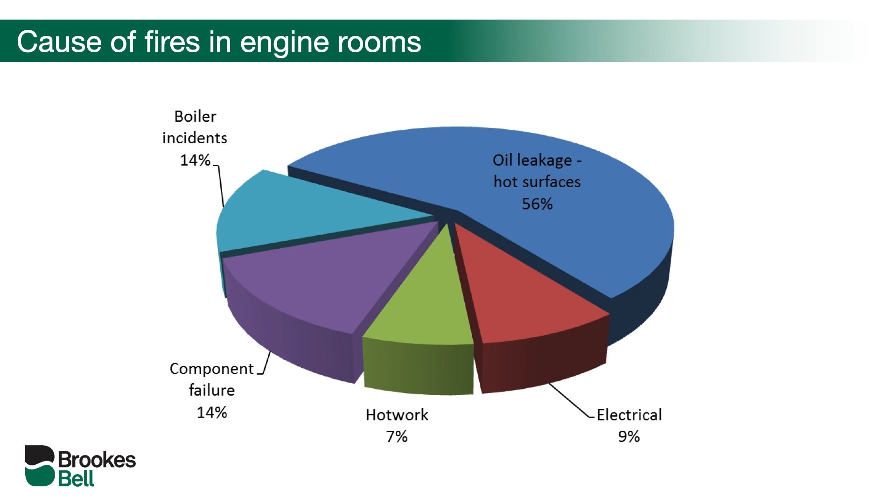Then we will narrow down even further to highlight a propensity of fires caused by failures within the low pressure fuel oil supply and return system, sometimes called spills, compared with the high pressure fuel injection systems. Now this is not all new news, and such fires reoccur despite SOLAS and other guidelines issued many years ago, a summary of which now follows.

New design rules were introduced in the SOLAS amendments of 2000 and implemented by 2003, as exemplified by this MAN B&W service letter to ship owners and operators dated January 2003, recommending the installation of jacketed double skin fuel pipes for high pressure fuel injection systems at the first opportunity.

In 2009, guidelines for fire prevention in engine rooms and cargo pump rooms were issued by the IMO Maritime Safety Committee in Circular 1321. Some of these guidelines are summarised in this slide, and I will be discussing more of them in detail later.

As regards the last item for hot surfaces, some may ask why the criteria is set above 220 degrees. Well, this is based upon the auto ignition temperature of the lighter fuels, such as MDO and MGO, which have a minimum auto ignition temperature of 250 degrees. So there's a margin of safety in keeping any hot surfaces, such as exhaust systems, below 220.

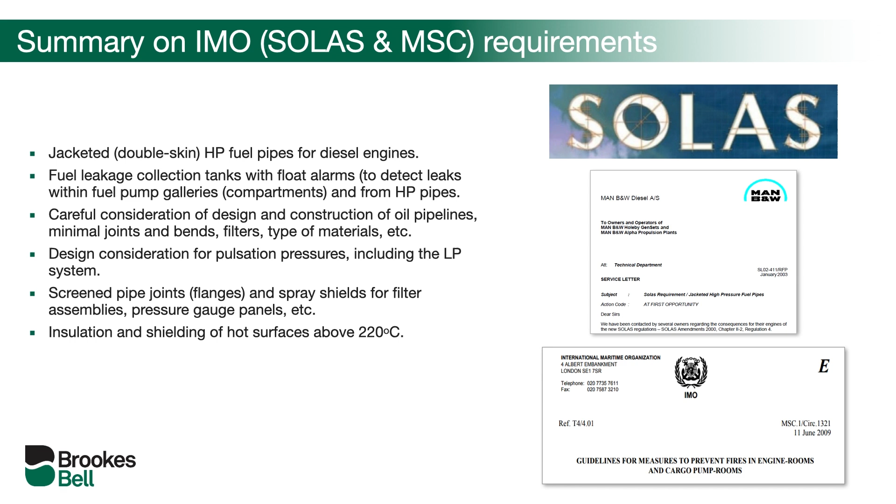Heavy fuel oils have an auto ignition temperature of about 400 degrees C, and lube oils are about 320 degrees C. Remember that auto ignition temperature is the temperature at which a substance will spontaneously combine with oxygen and burn without the need for an external ignition source. It is the vapour that ignites, not the liquid itself.

Here we see a diesel engine fuel system which incorporates some of the SOLAS requirements: a double-skinned high-pressure fuel injection steel pipe with minimum joints and bends, by having the pipe pass directly through the cylinder head to the fuel injector.

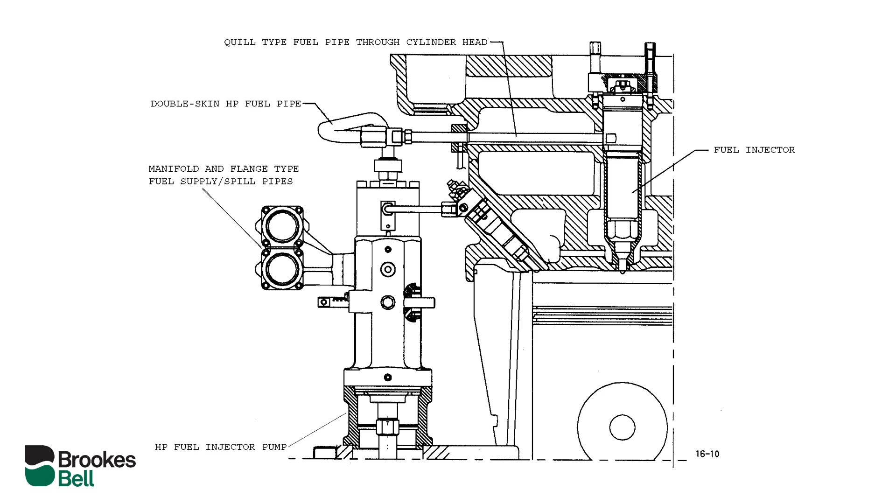These requirements have reduced the risk of high-pressure fuel system failures, but failures to the low-pressure system - that is, the fuel supply and spill systems - have persisted, as we will see later.

Here we see a double-skin fuel pipe, which also allows for the failure of the internal pipe to be detected by routing the annular space to a leakage tank with a float-type alarm. We will see later how other potential leakage points could be piped to such an alarm tank, for example, fuel oil filter containment enclosures.

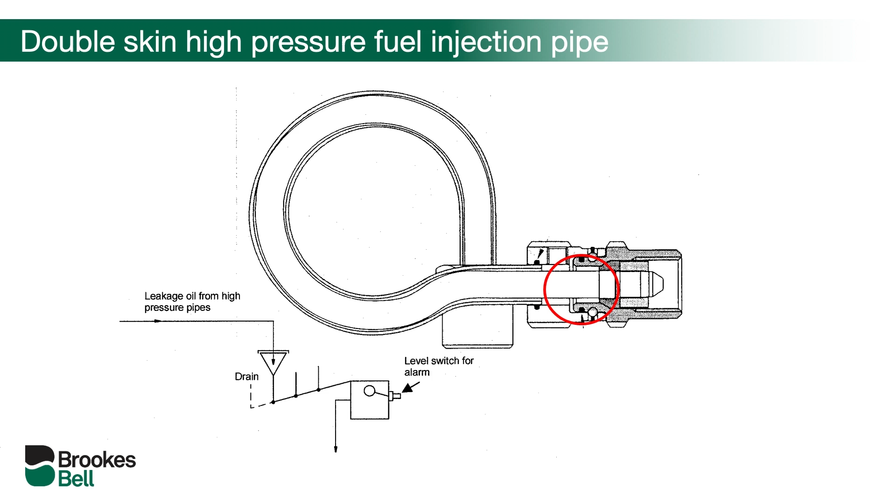Now, over the years, I've seen more fires involving 4-stroke medium-speed engines and auxiliary diesel engines, including those on container ships, which tend to have 4 generators compared to, say, a bulk carrier with 3.

For a large, slow-speed 2-stroke engine in the left-hand image, we see the fuel injection pumps, circled, are distant from the exhaust system and turbocharger. Only the high-pressure fuel injection pipe is nearby the exhaust system, but that pipe is double-skinned.

For the generator engine in the right-hand image, note that the filters, again circled, are in fairly close proximity to the turbocharger. Indeed, MSC 1321 recommends as much distance as practicable between fuel filters and hot surfaces or other sources of ignition, but we are still not seeing that implemented in all engine designs.

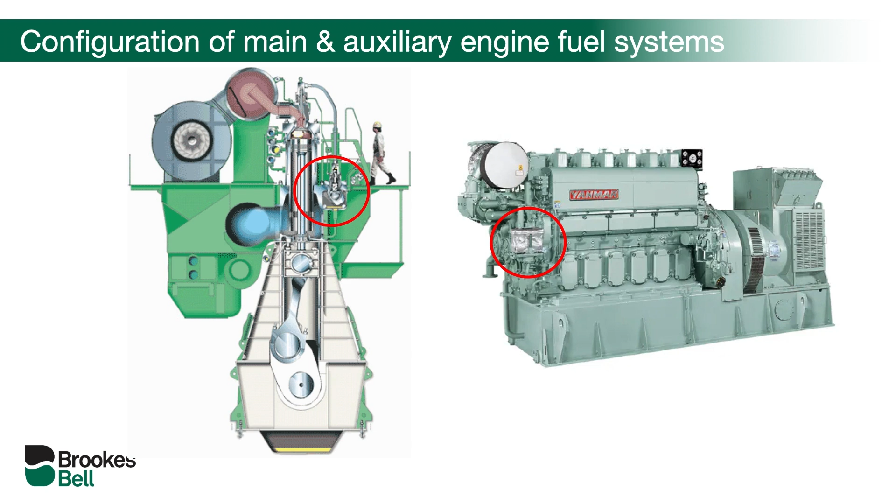Another factor is if the generator engine is using marine diesel fuel oil, which has a lower auto ignition temperature than the heavy fuel oil burned by the 2-stroke engines.

Here's a closer look at the filters on the Yanmar engine we looked at in the previous slide. Again, note the proximity of the filter to the turbocharger. Compare that with the filter unit on the Cummins engine, with the filters coloured in red, well away from the turbocharger.

It can be seen that the filters for the Yanmar engine have silver-coloured heat insulation covers, which may also offer some anti-splash containment, so long as the covers are always in place after cleaning the filters. We will see later that a better arrangement would be to have the filters still insulated, but also fully enclosed in a sheet metal box.

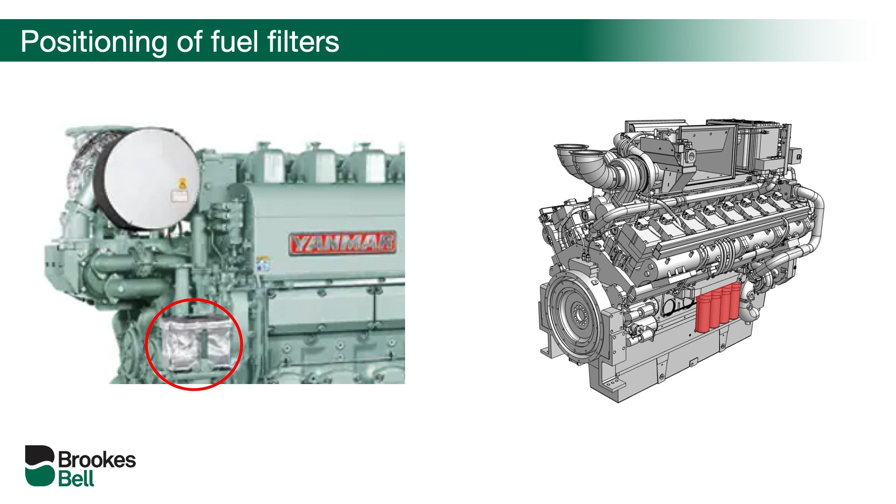Returning to the difference between fires caused by high-pressure systems with double-skin pipes and the low-pressure fuel supply and spill returns, we see the problem in these numbers: 50% of failures occur in the low-pressure system compared to the high-pressure system. This is important because intuitively an engineer may consider the high-pressure fuel system to be the greater risk, but awareness should always be directed towards the low-pressure fuel system as well, which appears to pose a significant, if not greater, risk of fuel escape and fire.

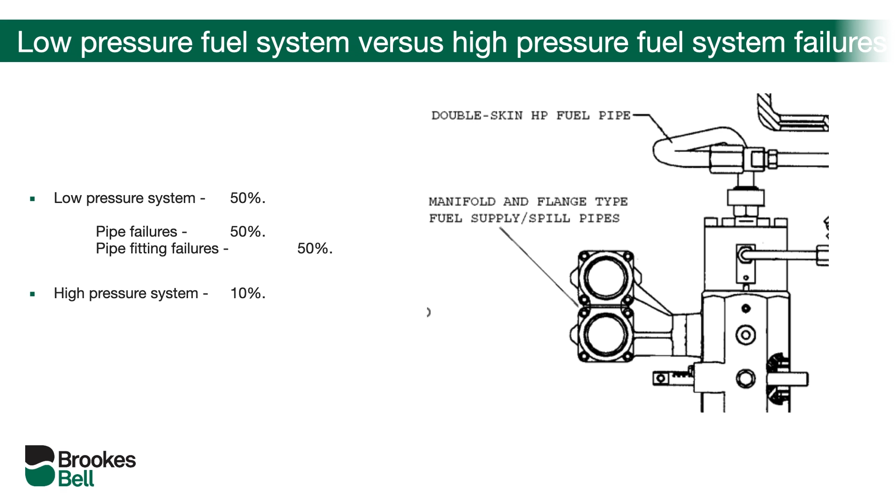Now let's look at some of the reasons why. So we have fatigue, vibration, pulsations, chafing - that's rubbing of pipes against each other or structures - lack of brackets for security, and so forth. Now, fatigue does not mean that the pipe or equipment is tired. Rather, in material science, fatigue is the initiation and propagation of cracks in a material due to cyclic loading.

The pressure during such pulsations can be several times more than the nominal pressure of the low-pressure system. The cyclic nature of these fuel pulsations, low supply pressure then high peaks, favours fatigue and the initiation of fractures due to tensile stress and failure, unless the pipes and fittings are properly secured. This applies to the holding down bolts for fuel injection pumps and bolts for fuel pipe flanges.

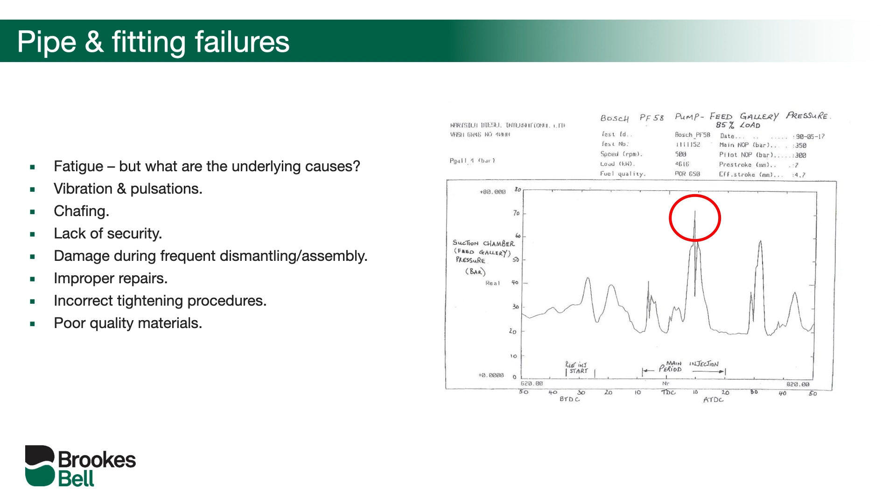We'll now see some examples from cases investigated by Brookes Bell.

This was a failure of a small bore fuel oil spill pipe on a diesel generator, which allowed an escape of fuel onto the turbocharger and a major engine fire. Metallurgical examination confirmed fatigue failure of the pipe, and the root cause was vibration due to missing brackets.

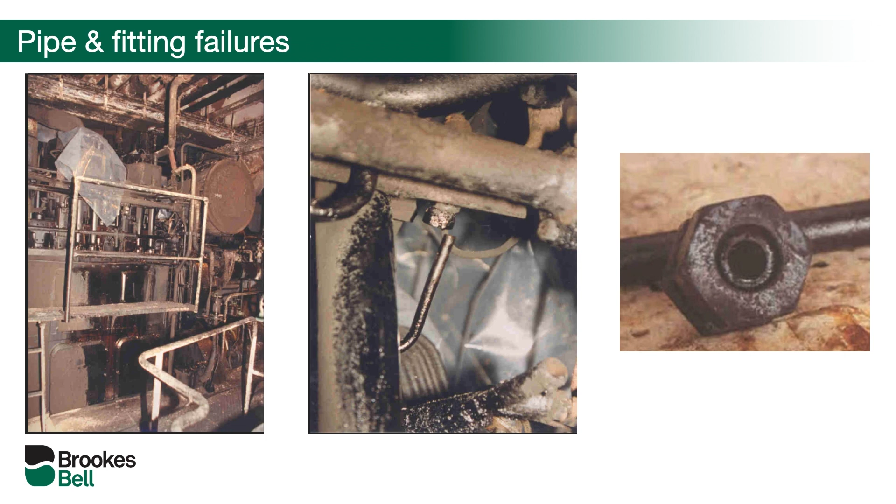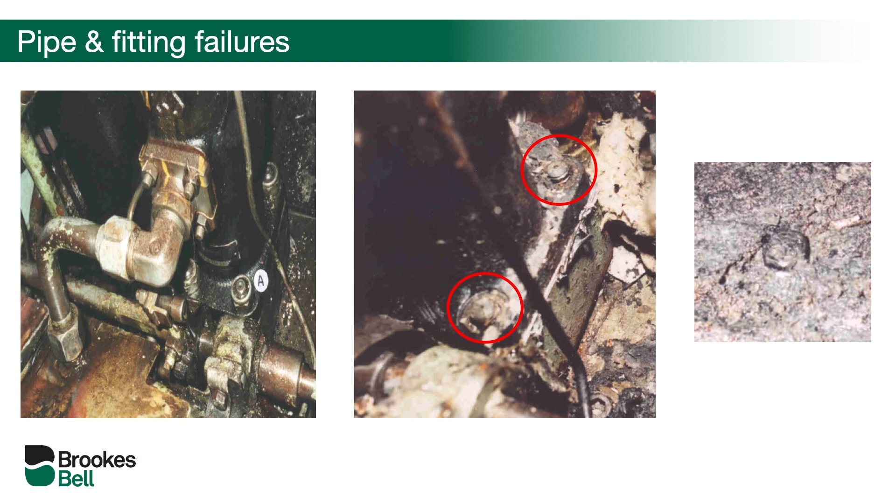This pump was then repeatedly lifting off the camshaft, resulting in an escape of fuel from the low-pressure fuel supply pipe, which impinged on exposed hotspots at the turbocharger. And this was the result of the fuel escape - a major fire.

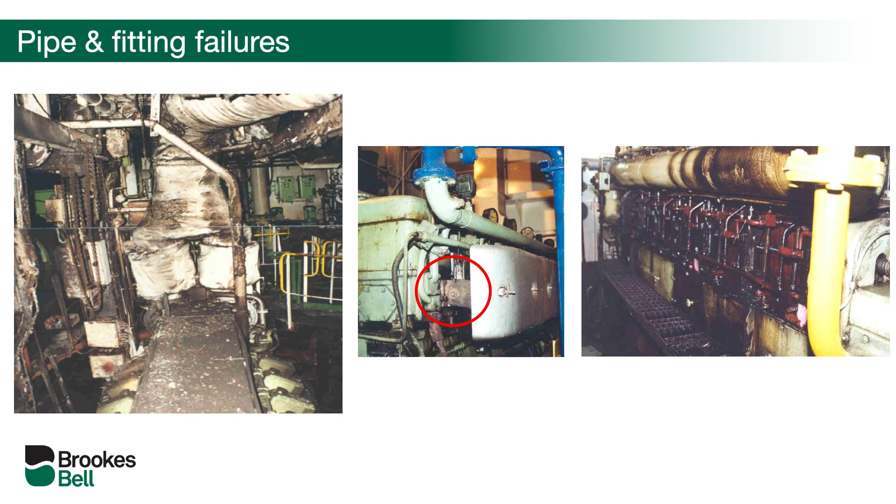The other generators were inspected, and you can see exposed exhaust piping in the centre image, and fuel leakages and a lack of covers at the fuel pump gallery on the other side of the engine, a result of poor maintenance.

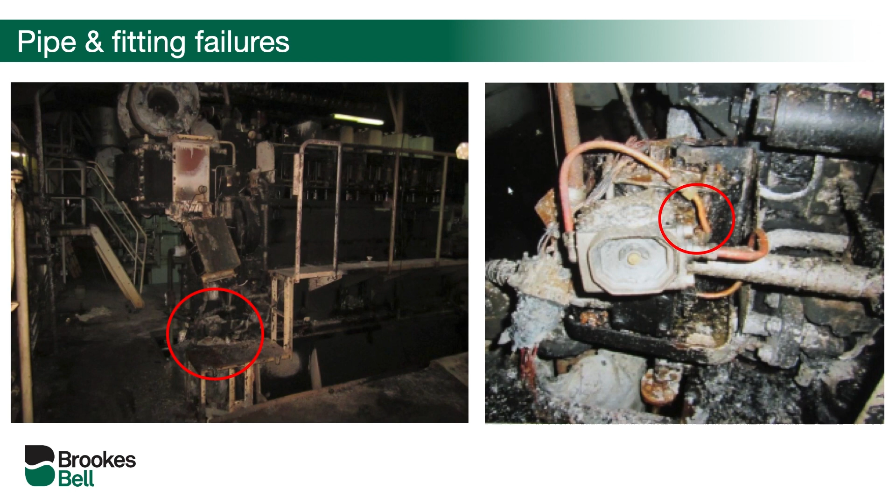So a number of things wrong here. The pipe should be steel, as provided by the original equipment maker, and not copper, because copper work hardens and becomes brittle and prone to fracture. Then note the poor installation involving a large loop and lack of brackets. There was also missing shielding from around the filters to prevent spraying of the leaked fuel oil.

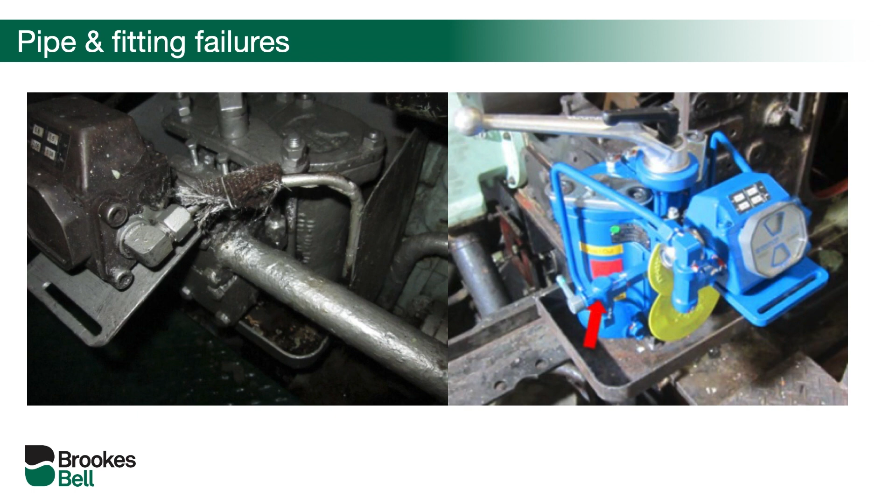Unfortunately, I found the IMO Circular 1321 and class rules somewhat ambiguous on the use of copper in fuel systems. If you word search copper in MSC 1321, you will see it appears four times. Section 6 refers to pressure and temperature gauges, and at 6.1, headed design, it states that copper pipes, where permitted, may be joined by brazing, but solder connections should not be used. At 6.3, under inspection and maintenance, it says copper gauge piping is particularly sensitive to work hardening, and all gauge pipes and fittings should be regularly inspected and maintained in good working order.

Then in section 7, under pipe fittings, it states at 7.14, dealing with design, all copper and aluminium brass pipes should be heat treated, annealed - that means softened after work hardening during installation - and fitted with sufficient supports to prevent damage from vibration. So far it seems copper pipes are permitted, but then it says replacement with steel piping should be considered.

Finally, much later at pages 14 and 15, which refers to the high-pressure pulsations in the low-pressure fuel supply systems which I addressed earlier, under section 1.3, design considerations, and 1.3.5, it says fuel pipes should be of steel, and support should be adequate to prevent fatigue due to vibration, and the support arrangement should also protect the system caused by high-pressure pulsations. Then it states copper and aluminium brass should not be used, as their inherent work hardening characteristics make them prone to failure when subjected to vibration.

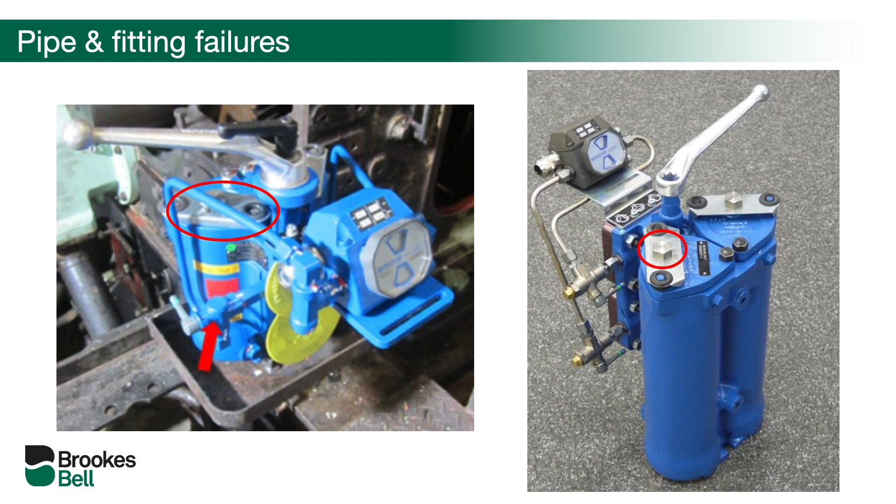At the exhaust system, on the left-hand side, there are potential ignition sources: the exhaust system, as I mentioned, and electrical devices. In container ships, there may be a similar arrangement, but with 2 generators in pairs, port and starboard of the engine room.

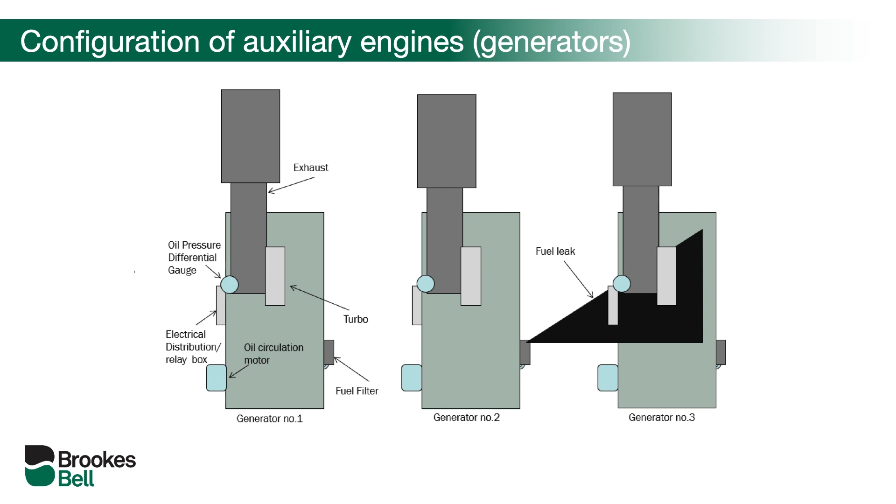These are the images of generator number 3, which caught fire, which then spread back to number 2 generator. We can see the oil circulation motor at the bottom left and the exhaust turbocharger assembly. There's also some electrical distribution relay boxes and pressure switches. So some potential electrical ignition sources, but the actual ignition point was the exhaust system in way of the turbocharger.

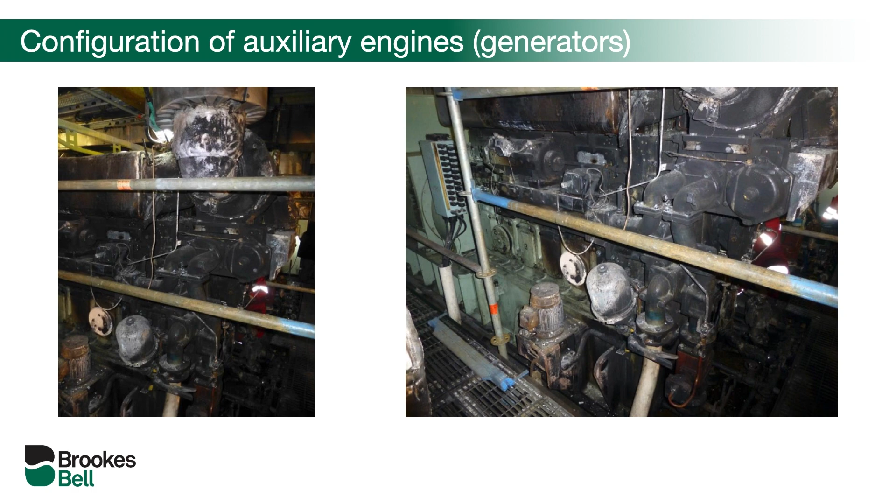Here we can see the insulation on the exhaust on the left-hand image, where it comes from the manifold before it enters the turbocharger assembly. There is a gap in the insulation, exposing bare metal of the exhaust pipe underneath.

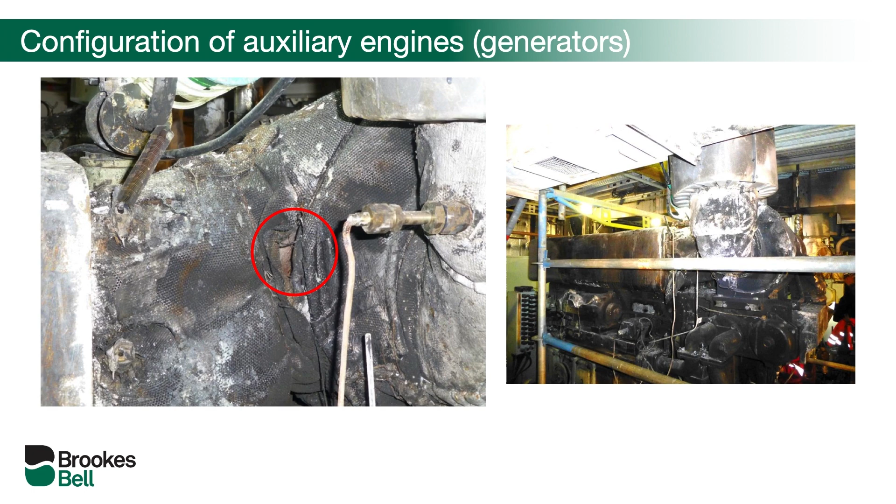This was a similar incident when an escape of fuel from number 2 generator filter assembly impinged on the exhaust system of the adjacent number 3 generator, the fire then flashing back towards the fuel source, creating another fire at number 2 generator. Note that the duplex filter unit is partially enclosed in a sheet metal box to prevent the spray of fuel onto its own exhaust system behind the box.

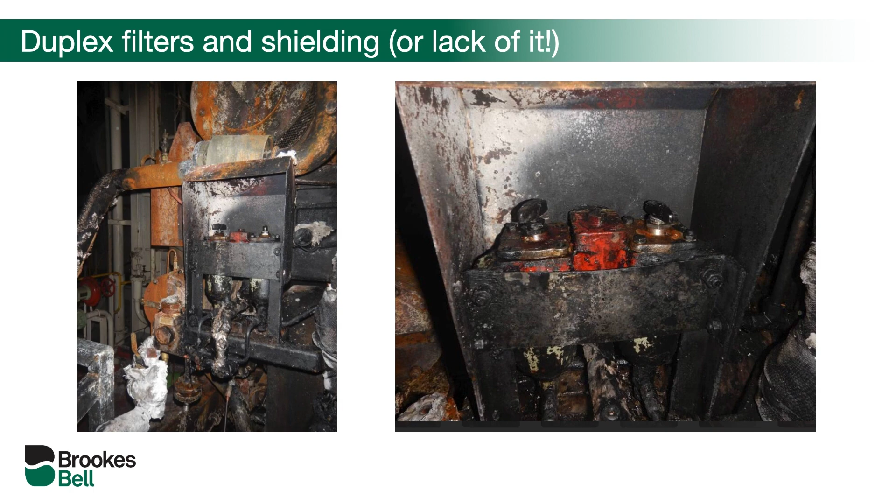The turbocharger can be seen just above the filter. But there is no front cover on the box to prevent spray of fuel onto the adjacent generator or its exhaust system. The bolts had failed at the left-hand filter unit and the cover had lifted, allowing the escape of pressurized fuel.

Note the engraved marking on the changeover cock, which indicates both units of this duplex filter were online. In this case, we were denied access to the broken parts of the bolts for metallurgical analysis, but given the condition of the bolts at the other filter unit, it's possible that bolts were defective.

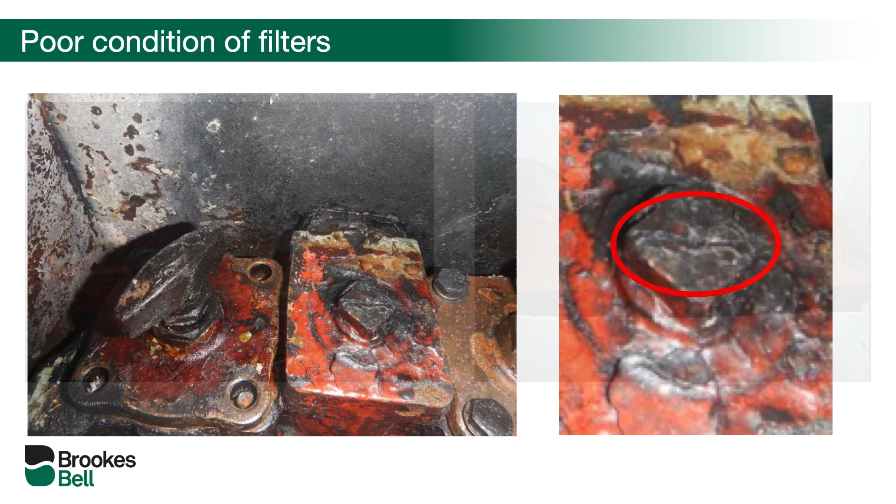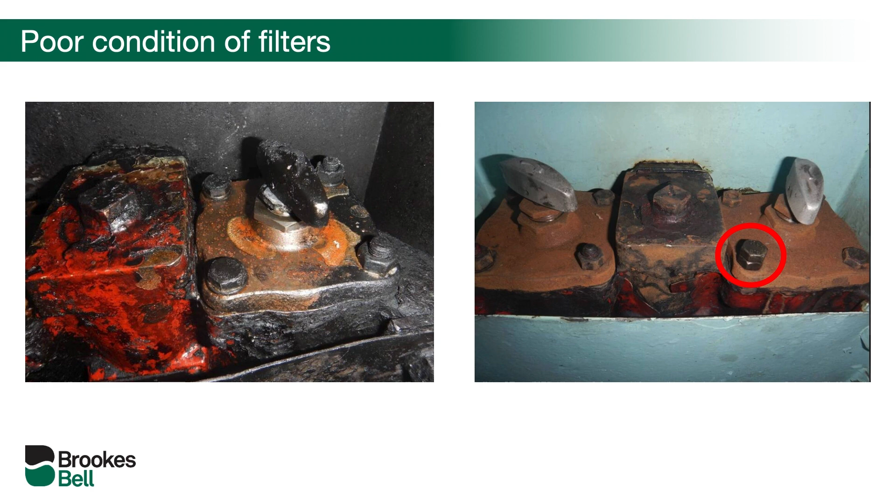In the left-hand image, note the mismatch of bolts and studs. Same situation in the right image, with one bolt in the right-hand unit, which is circled, being apparently too long, requiring a spacer provided by the nut beneath the bolt head. It is unlikely these parts are original maker's parts or tensioned properly.

The internal surface of the box could also be lined with heat insulation material, and the filter manual instructions for changeover and cleaning, together with warnings to properly isolate the filters, could then be laminated and posted close by the box. One of my colleagues recalls one ship owner arranging for the retrofitting of complete boxes over the filters for the generators, and I think engine and filter manufacturers could assist with this arrangement.

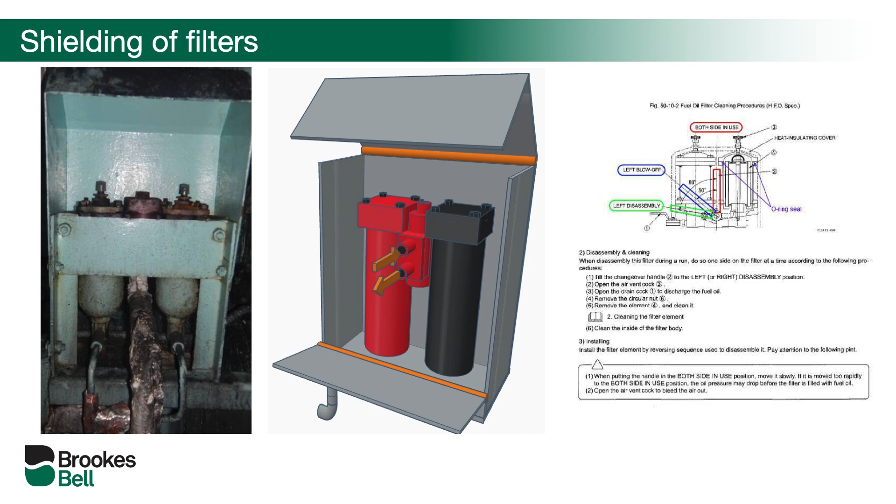Now, there have been other cases involving confusion as to which duplex filter unit is in use online and pressurised, resulting in the release of pressurised fuel during opening of the wrong unit when the engine is running, or the fuel supply system has not been properly isolated for the stopped engine. The filter changeover cocks typically feature these T-shaped engravings to indicate which unit is online, which is on standby, or both are in use, as we saw earlier.

So the standby unit is the one which has been isolated, cleaned, vented, and ready for use next time. But if not maintained properly, these markings can become obscured or painted over, introducing a serious risk, as we will now see in the next example.

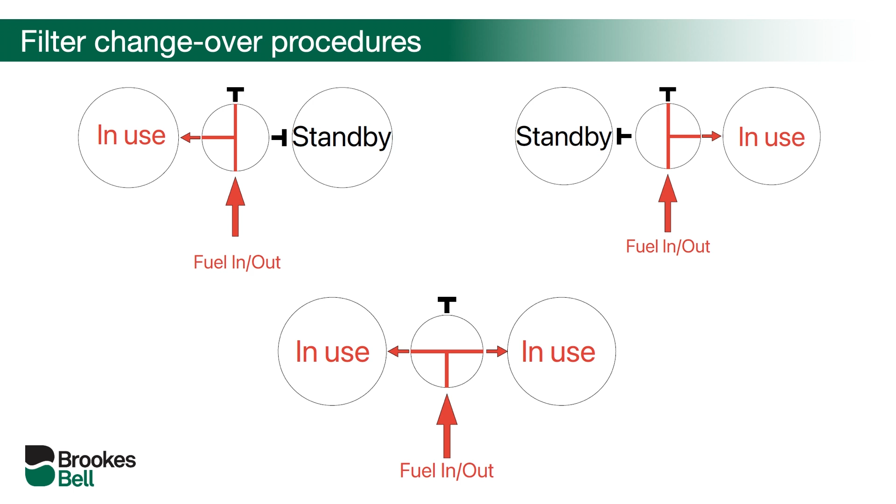This was another case of an escape of fuel from a duplex filter assembly, in this case from number 3 generator, spraying onto the exhaust system of the adjacent number 2 generator. This occurred as the engineer started to loosen the nuts at the left-hand unit, which is still wetted by fuel.

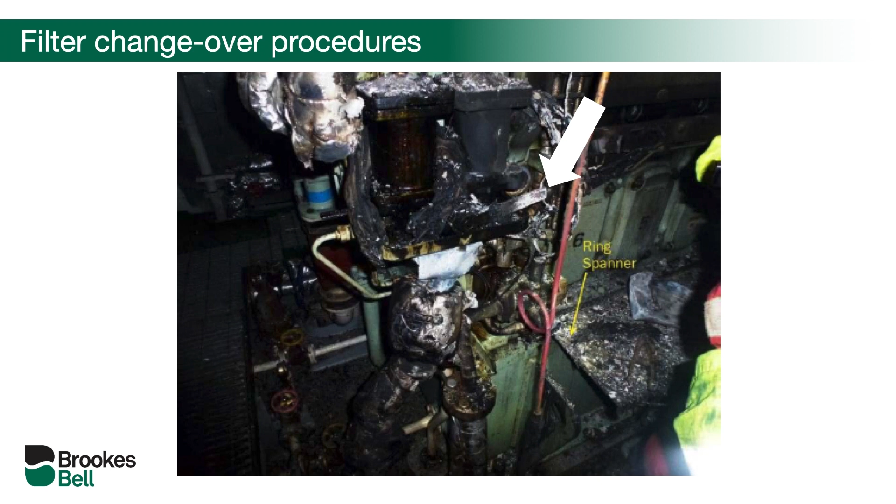As the nuts were slackened off, the cover partially lifted under pressure and the O-ring seal ruptured, allowing the escape of pressurised fuel, which sprayed on the engineer and the number 2 generator exhaust system behind him, which then created a fire, which then spread back to number 3 generator.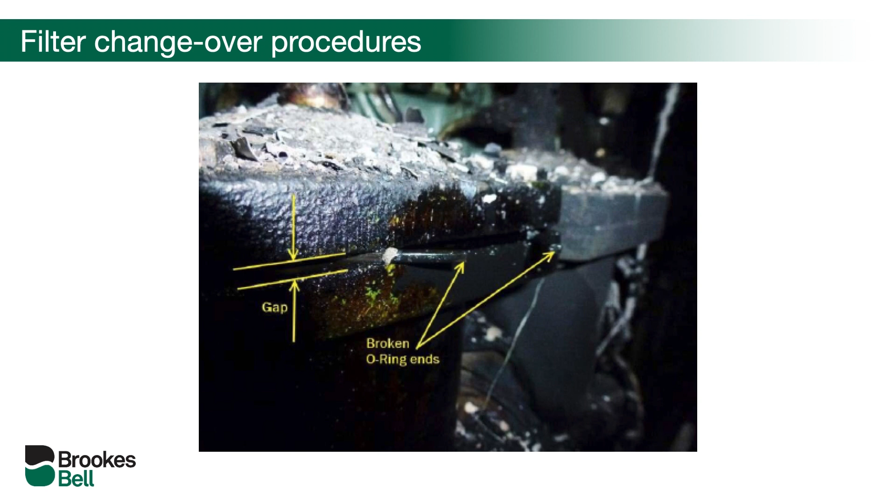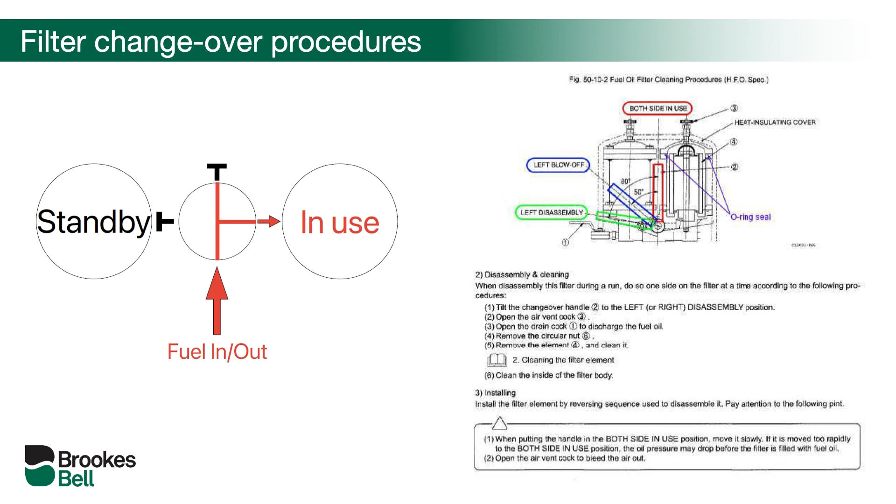Now, the manual for the filters did stipulate, however counterintuitive, positions for the changeover handle or lever for disassembly. So in this example, comparing the manual diagram with the green handle in the right-hand image being in the disassembly position for the left-hand unit, then the marking on the spindle, if any, would indicate that the right-hand unit was online and not the left.

Now, in this sad case, there were other factors involved, namely, although the engine was stopped, the fuel supply pump which served all 3 generators was still running, and the supply valve for number 3 generator was still open. It should have been shut, thus isolating the filters. Also, the filter vent and drain, had it been opened before starting to remove the cover, as was stipulated in the filter manual, the engineer would have realised the unit was still under pressure.

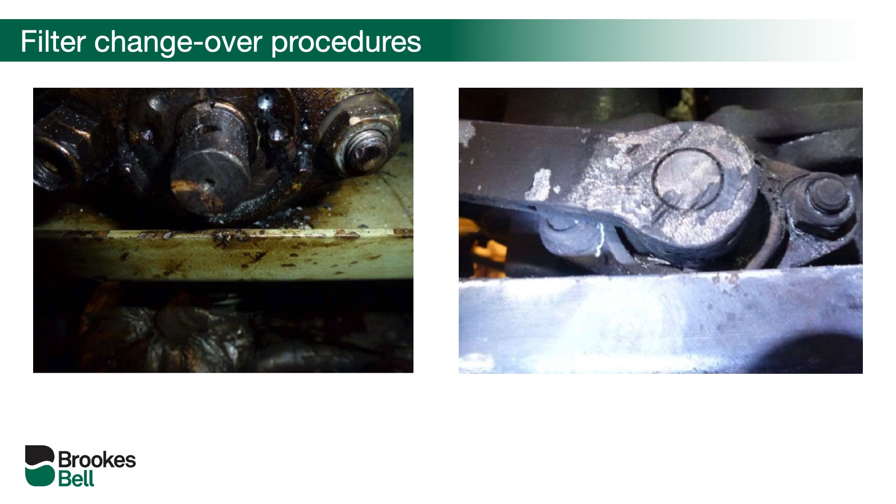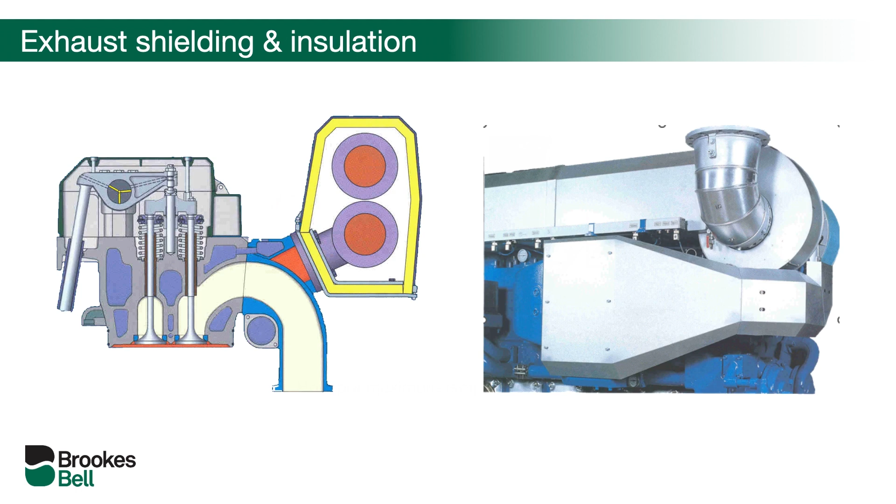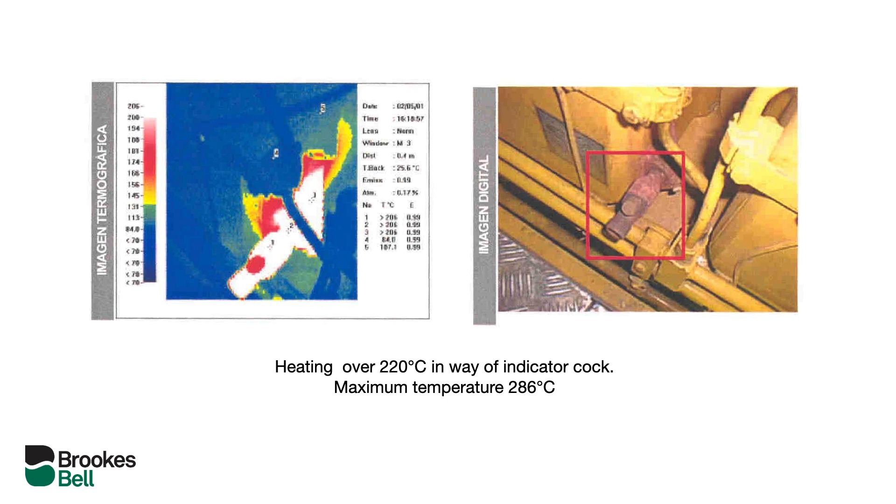Good maintenance practice should include the use of infrared laser thermometers or thermographic cameras to detect hotspots after repairs and routinely. Very often indicator cocks are not shielded. Here we see 286 degrees, well above the 220 limit. Such instruments as these can also be used to trace electrical hotspots at main switchboards, in particular high voltage switchboards and distribution boxes.

Now let's look at some prevention of engine fires. We've seen examples of poor maintenance and repairs, so our starting point would be there, putting that right as a fundamental to prevention. I'll be coming back to routine tests and inspections, but we've also seen crew training is also fundamental to safe operation of the fuel systems.

As for third-party inspections, it is important that inspectors have experience or at least knowledge of the root causes of engine fires, so they look at installations with scrutiny and an appreciation of the risks. For example, the incorrect and poor installation of copper pipes that we saw at the filter differential pressure gauge in slide number 16 was present when that engine was inspected and tested at a class survey without comment. And how many times have inspectors checked a generator fuel filter is not fully shielded and not appreciated that an escape of fuel could impinge upon the exhaust system of an adjacent generator.

Therefore, fire prevention audits may be considered by ship owners and managers using inspectors who have investigated engine fires. This approach was taken many years ago with MARPOL surveys to prevent oil pollution, including illegal discharges, with surveys being carried out by inspectors who had been involved in such investigations.

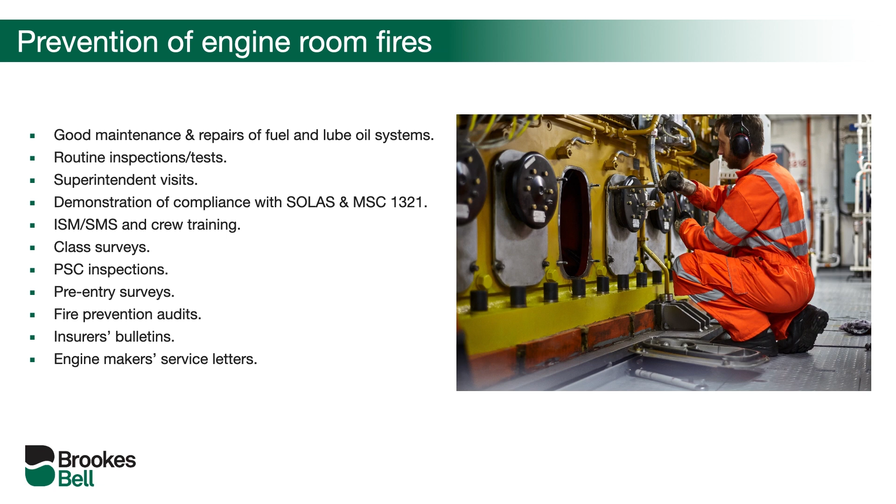There are many articles issued by insurers that use warnings and recommendations for fire prevention, and ship owners and managers should also ensure that they receive engine manufacturers' service letters, some examples of which we see in the next slides.

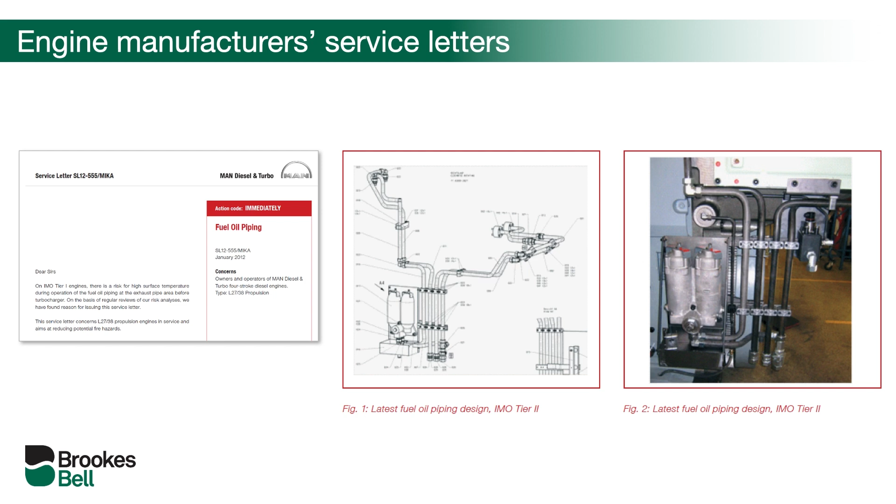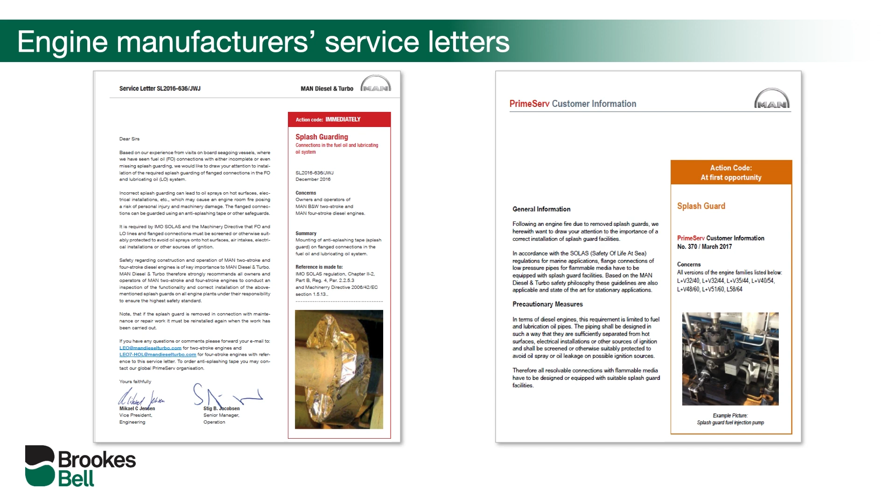These recommendations and others can be incorporated into the ship's planned maintenance system for the engine department. They can also be included in superintendent's visit report checklists.

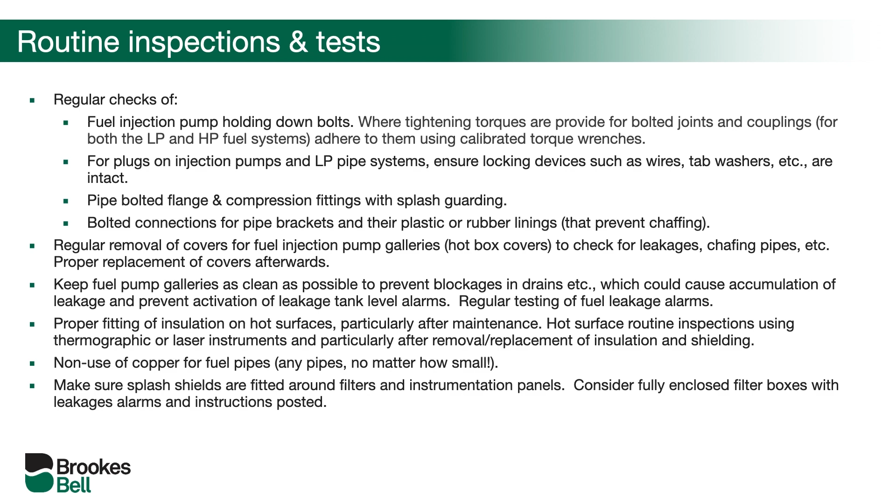But I do think the IMO guidelines could be tightened up to make it clear that copper should not be used for fuel pipes, and filters should be fully enclosed, and also consideration given to relocating the filter assemblies away from hot surfaces and other ignition point sources.

These provisions and others could also be stipulated by ship owners and managers in repair specifications for refits and dockings, and also in new build specifications. Obviously, engine makers could also include these provisions and make recommendations for selling by way of more service letters.

Root causes of engine fires typically involve engineering and mechanical failure, so very often a multidisciplinary approach is needed for proper investigations. Although today I have concentrated on oil fires and hot surfaces, we have investigated other causes such as hot works, human error, catastrophic machinery failures, and electrical failures.

Again, these have often required a multidisciplinary approach, and sometimes investigative software tools such as 3D modelling of engine rooms, computational fluid dynamics, and finite elements, all of which we have in-house and can use for fire modelling for fire prevention and spread of fire and smoke.

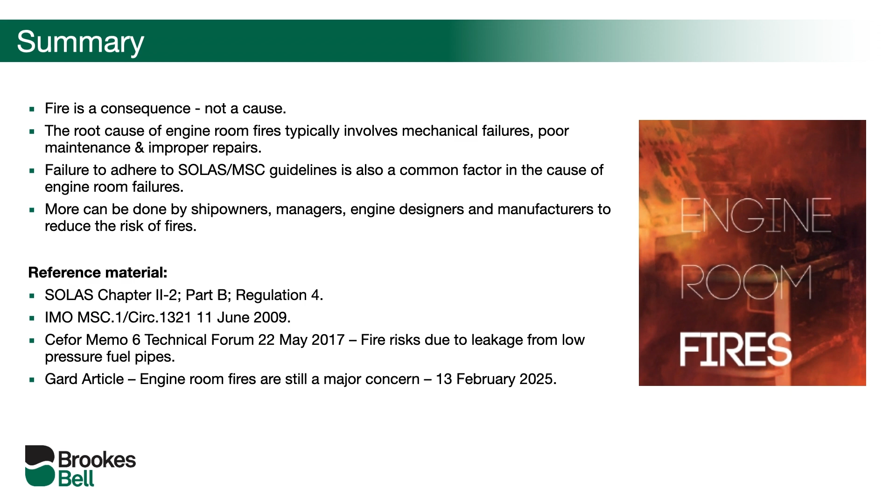Finally, I have listed some of the material I've referenced, in particular for this presentation, for which I'm grateful, but there are more articles issued by P&I clubs and other sources on engine fires on the internet.